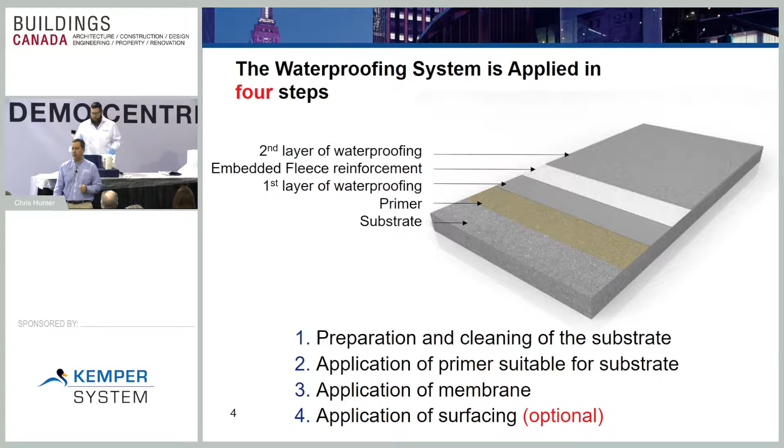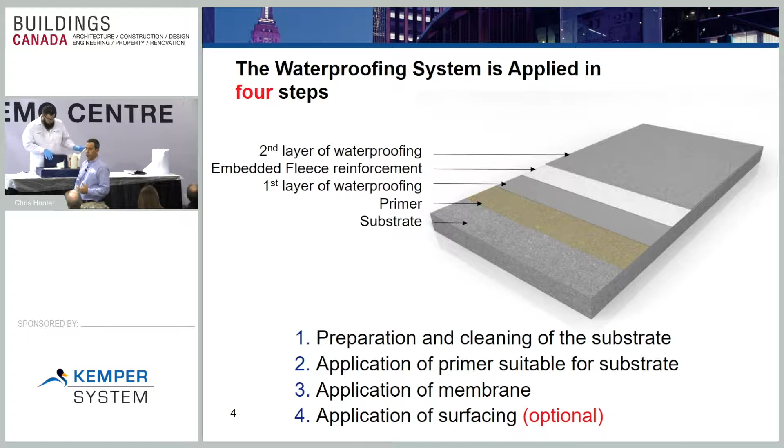You'll mix the liquid. The liquid is put together. You're going to pour it out, 2/3 liquid into the field. You're going to roll the reinforcement fleece into the resin so it'll strike through, similar to painting. Same idea, you put the fleece into it, it'll strike through, then you're putting a third top pour. So everything's applied with a nap roller.

The types of primers we have in the marketplace, we're manufacturing 3. We list them in terms of performance. We have a 2-component. What that means is you always have an A and a B product. So as soon as you add the part B to the A, it creates a chemical reaction, an exothermic reaction. It generates its own heat, and that's the curing mechanism. You're not bringing a torch, you're not bringing a kettle to site, you're mixing with pre-sized containers. Everything is mixed, it cures 100%.

We list the 2-component as the best because we can use it inside and outside. There's no VOCs. There's no hazardous waste coming off the fumes. We can do mechanical rooms, penthouses, pools, spas, wet rooms. Same product you can use there, we can use it outside. So it has the biggest window for use. We can do schools, hospitals that are in desperate need to have some areas waterproofed.

We also manufacture a single component. There's no mixing. You'll just stir it, pour it out, and what's there you use, you can always close the lid if you don't need all of it.

And then there's a PMMA. It stands for polymethyl methacrylate. It's its own system, its own resin chemical. It's fast curing. You wouldn't want to use this inside. You can use it outside on a roof or details, small jobs. The primer sets off so fast. It's a really nasty smell when you install it, so you would get shut down. So great product, we have it all.

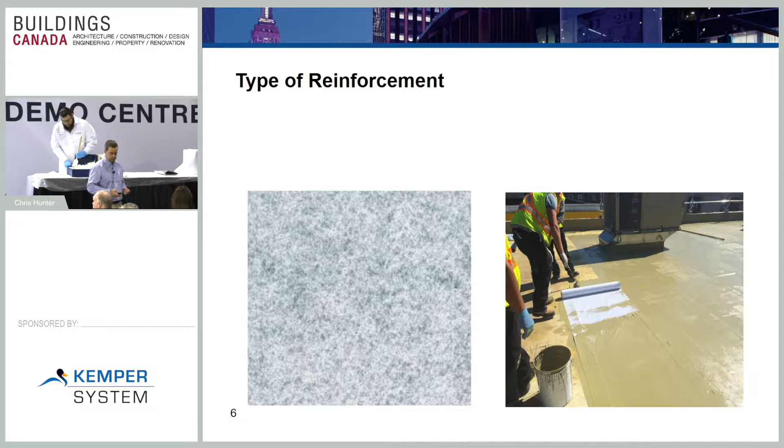Here's an application on the right. You can see them. They have the rolls. We have different roll sizes, all the way up to 41 inch as our largest size. So you can get a lot of production, ease of application. You're applying it, it becomes monolithic. You're just creating a bathtub on that roof area. Very compatible with all different substrates.

We're able to do the parapet first, roll out the fleece. Someone's mixing it, pouring it out, rolling it in. Fairly straightforward. You're encapsulating the fleece, whether it's gray or white or a tan color. So you won't have any dry areas.

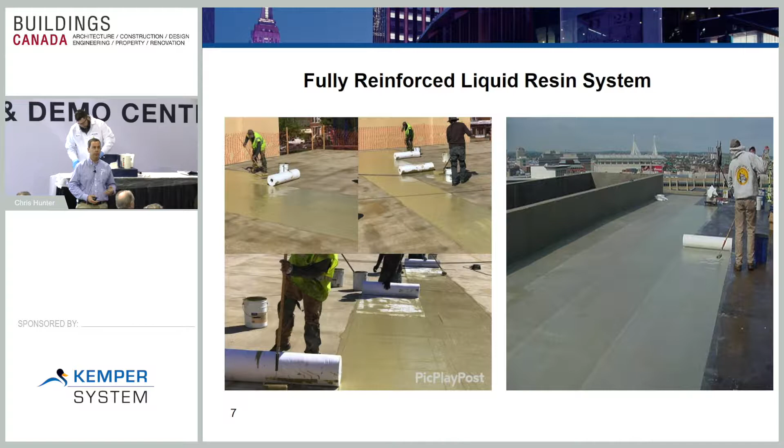Mixing with the resins, there's different resins. So two component, you're always going to mix. You're going to have part A, you're going to mix part B. As soon as you mix them, it creates an exothermic reaction, generates its own heat, its own curing. So the chemical links will slowly be closing. Some are faster than others.

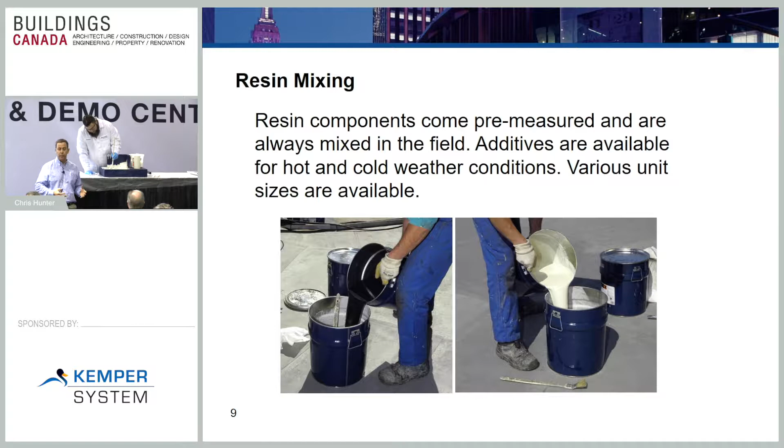You can either slow it down or speed it up, depending if it's in winter conditions or if it's really hot out. What do you think is going to happen? It's a little harder to work with, but you can slow it down. So depending on which resin you want to use, you might change it based on the time of year. That leads into the next area.

Quite often we're asked, what temperature limitations can you use these products at? We have winter in Canada, 6 months of the year. Cold temperatures, there's 6 months of warm. So we're half seasonal here. In the US, they have a lot of high heat in different climates, but the product's used in every state, and we've been using it through different provinces here.

You just have to know what time you're going to end up installing it. So your window can be shorter or longer depending on your climate. So for example, Toronto, we're probably going to have an extended season versus Calgary. Calgary's pretty far up north. So if they're getting snow, you got to be careful where you're going to be.

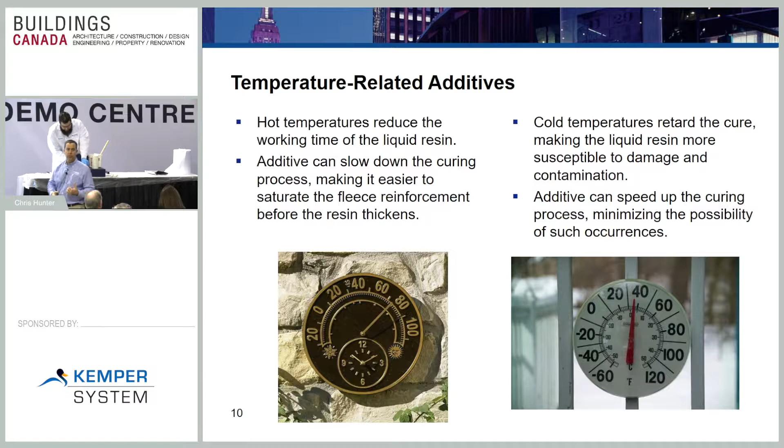So -5, you can apply the products down to -5. Typically, it gets hard to work with at 90 plus Fahrenheit, or if you're at 35 degrees Celsius. It'll start curing a little too fast for you. So you want to pick the day, the application where you want to apply the materials. So we're doing the education on that through the contractors as well. So we look after that with them on their training.

Now this is the fun part, types of resins. There's 4 main ones there. We have a polyester that we showed at the beginning. Dr. Heinz Kemper invented that one. That's the grandfather of everything after that. That's been in the market for 60 years. The 2K and the Reflect 2K. The Reflect 2K is an enhanced formulation that we've had for 25 years. The 2K that we're demonstrating here, I'll talk a little bit more about it later.

The one component urethane is nice in the point that you can open and close the lid, you can mix it, you can pour it out. And any material you haven't used in that can, you can use it on another job site or you can continue use. So it does have some solvent in it to keep it fresh. And the PMMA is a good product too. It's very rapid setting, so you're going to be using it on an exterior application.

So I'm going to pass out some of the samples here. Some of the products listed. This is a V210, we call it. That's the original invention, Dr. Heinz Kemper. So that's the polyester. That's the one that's on the Volkswagen plant. If you'd be so kind to review those and pass that along when I pass them out. This is the, we call it AC Speed FR. This one here is our PMMA. And Mr. Walton here is doing our Reflect 2K. So we'll let you come up here and see that at the end of the slides.

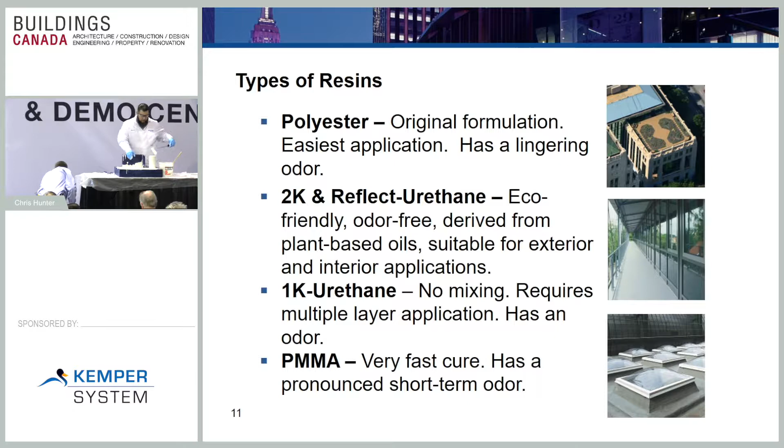Passing out a couple more samples here. This is a 2-component urethane. Huge range of surfacing options. So once you've done your roof or your waterproofing application, you can put tiles over it. You can put some kind of overburden over it. You have a range of applications. There's some decking, tiles, pavers, traffic surfacing. So I'll also pass these samples out for the traffic. So the traffic systems and coatings.

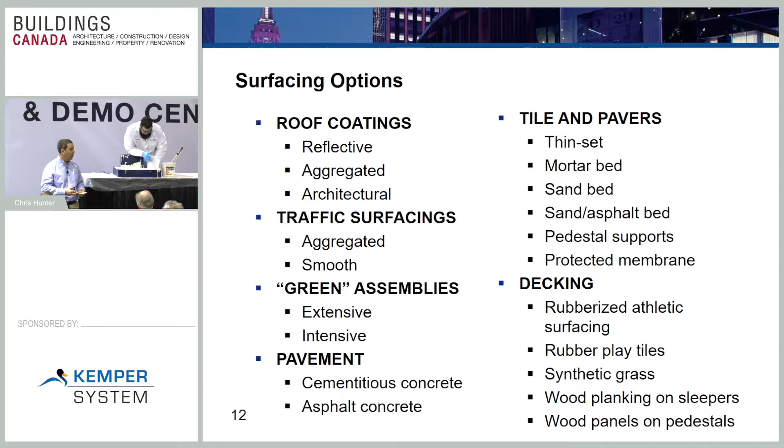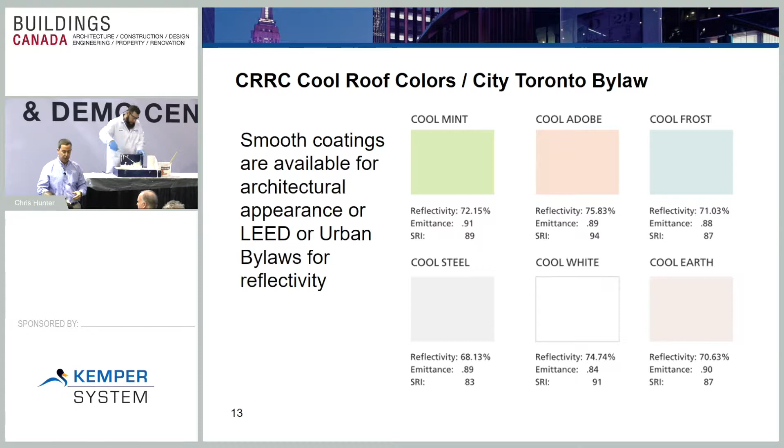So in terms of the coatings, we can get a high albedo in different colors other than white. So you can put a top coat to the urethane. It becomes a chemical bond. It's not a mechanical bond. A chemical bond means it's chemically embedded into the same resin. So urethane to urethane. So you're not going to have peeling, chalking, fading later. Pass this around. We have 31 different colors you can put different top coats to.

This product here, we have a traffic surfacing over the membrane. So the traffic coating is like a floor coating that protects the membrane from damage. And on top of that, if you're using it outside, you need some traction. With some traction, you want to have a non-slip surfacing. So we're either using something really nice like a ceramic quartz for aesthetics, or the other way is we can put silica sand in the top and it'll paint to a different color. So I'll pass this around.

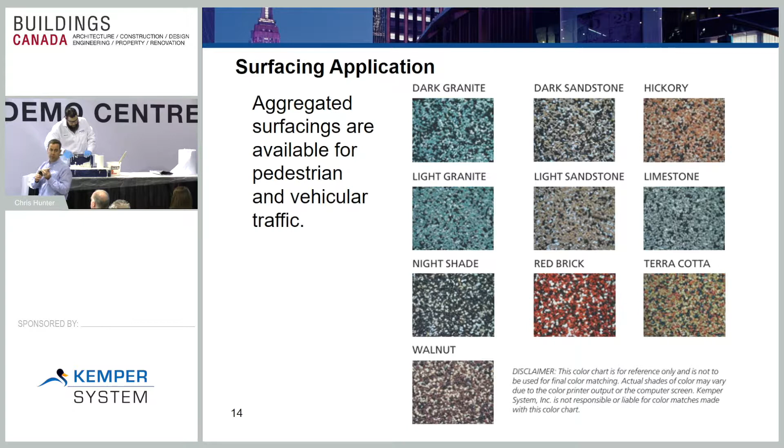So this replaces asphalt and concrete because the traffic coating on here sits up. It's about 3,500 psi. So we're protecting our membrane, but the key is we're waterproofing below the structure. The membrane itself is 90 mil. It's not petroleum based. When it hardens, it becomes synthetic. So the life cycle is far beyond asphalt based products' chemistry.

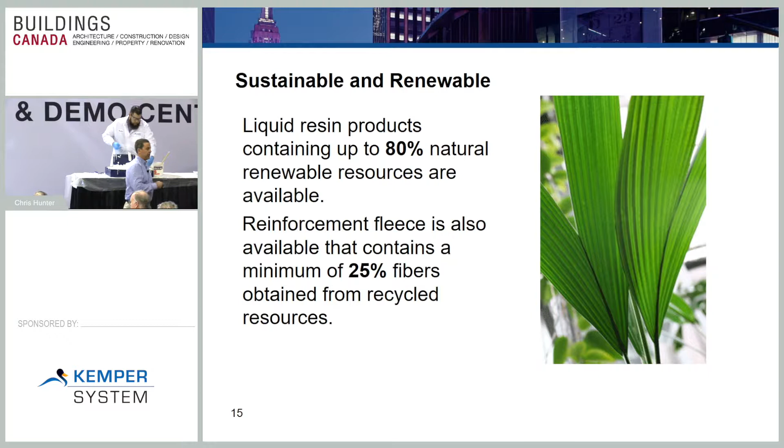Nice thing about liquids too, you can choose if you're looking for some points with LEED or you want to be really green, the product is naturally green. What I mean by that is plant-based urethane, 80% rapidly renewable. What we're showcasing here on the Reflect 2K is 70% rapidly renewable.

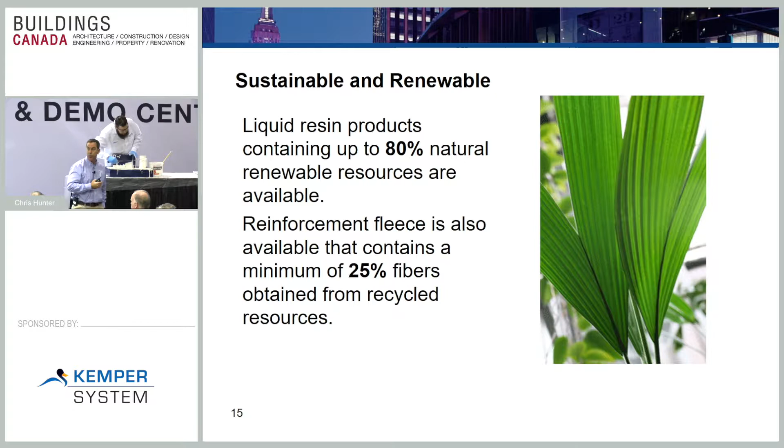Liquid resins make the most sense for garden roofs. How many designers do we have here that have been using some garden roofs doing some work in the city of Toronto? None? I've worked with a few. So what we're looking at is having a product that goes down that can extend the life of that vegetated roof. So you don't want to choose a membrane that you might have to come back and replace prematurely in 10 to 15 years. You may want to look at these type of products to extend the service life of your building.

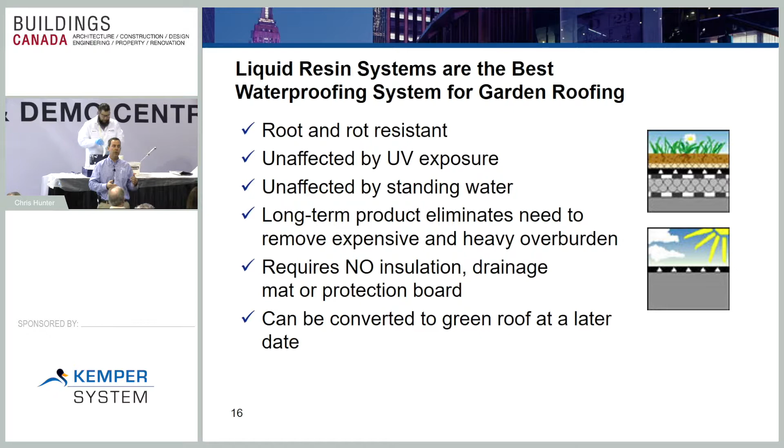I mentioned the Volkswagen plant. That is completely exposed to climate, elevation, hot, cold, freeze, thaw, and suspended over insulation. So typically a garden roof's going to go over top of the membrane. It does offer, like a blanket, more stable temperatures. So you could think, hey, if that product lasts 50 years, how long was it going to last underneath the garden roof? It's root rot resistant. It's a synthetic product. It doesn't promote roots to grow into the product. It's very nice. You're creating a monolithic bathtub. So it makes a lot of sense. Garden roofs are very expensive, so you want to choose the right product.

We did the renovation at Fallingwater. Frank Lloyd Wright, famous landmark. Mr. Walton was involved, I believe, in that application. Turned out very, very nice. We show that in our fountain features. So this product, the same product you're using on your roof, is used in the fountains. Why? Because it works. It keeps the water out. And it's monolithic. It completely encapsulates your substrate. It's like the skin on your hand. It'll conform to each finger, each detail that you have on a particular site. Sheet products can't do that.

So we've been used on roofs and in waterproofing applications. A whole track history there of applications, depending on the owner. So let's get into the fun part. Some applications in Canada. How many people have been to Vancouver? Great. You've visited Canada Place. So we just renovated an existing hot rubber system. We've put back KEMPER in lieu of that and tied into the existing hot rubber system. So we renovated about 10,000 square feet in liquid resin, put back all the pavers, and actually our product comes up onto the railing and it was painted white to blend into its surroundings. So it's a nice job as an application showcase for us.

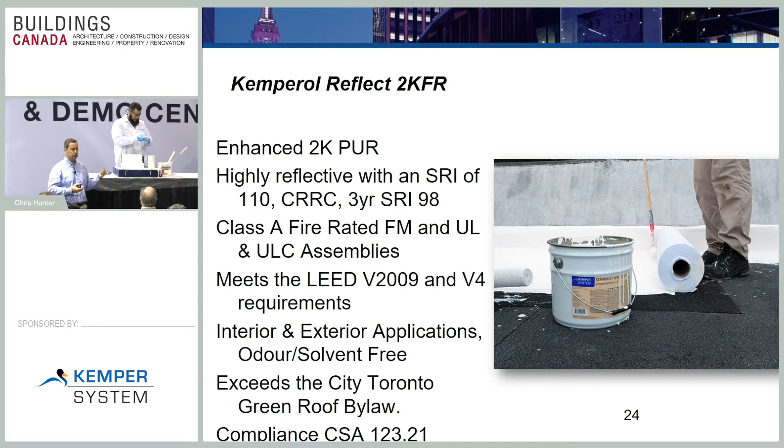We came in at a whopping 98. It hardly dropped. It's super bright. Fantastic product. It won't yellow. It won't fade. It'll stay bright, shiny. It's got all your codes and approvals. You can use it interior or exterior, but on a white reflective membrane, it's really for codes and approvals for municipalities that need either a garden roof, stormwater management, combination with our membrane, and a high albedo to reflect the light. So white roofing. So in City of Toronto, this product exceeds their bylaw in terms of its performance reflectivity.

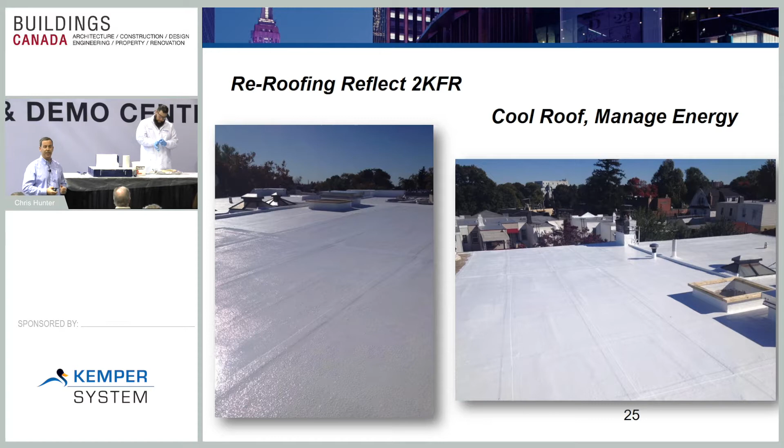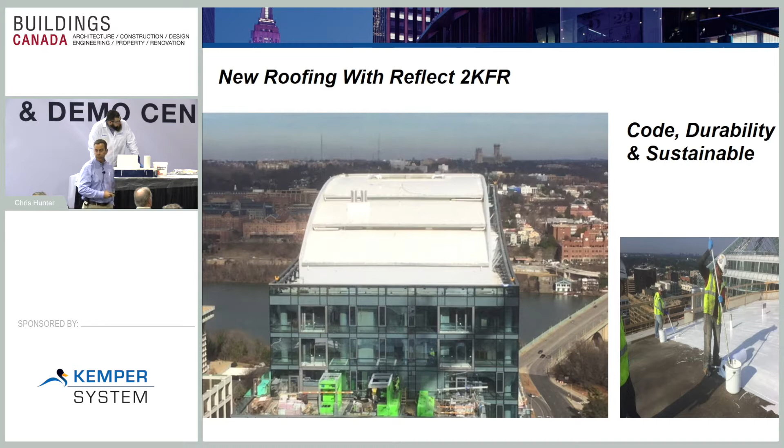So technical support is key. So how do we get there? How do we help you? We do the presentations, we have the specifications, we have the details available online. We have a fabulous training center. We train the contractors. We certify the contractors on site. We support you. We're there. So it's a partnership from the designer to the owner to the contractor.

And we have certified contractors for each type of application. We either have a waterproofer for grade, we have roofers for roofing, we have restoration contractors that are doing some service work with clients as well. So we cover all the spaces with the same product. The same product that's in the field is the same as your flashings on your details. It's important. For roofing, you need codes and approvals. For waterproofing, you need codes and approvals. So we have those. We have third-party certifications.

Just to do a recap, again, with some closing comments, the reasons why are quite clear. It's very sustainable, extends the life of your building, unaffected by UV, standing water, exceeds a lot of the municipal bylaws. Stormwater management, high albedo roofs, combination with garden roofs, works well. You can also, with waterproofing, put surfacing on it. It's its own system. So you get the waterproofing benefits.